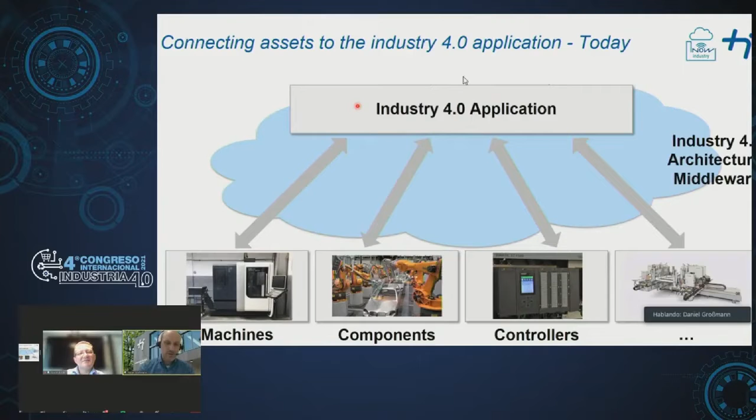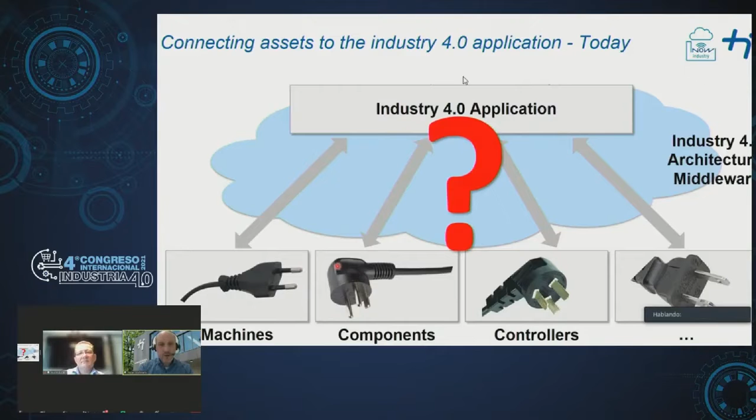So the problem with that is that today, as many of you know for sure, all these vendors have different communication protocols, different data structures. So as shown by these different symbols of plugs here, we cannot just seamlessly connect them into Industry 4.0, but we need to do data engineering. So that means we need to build software to extract, transform, and load the data. And this software sometimes looks a bit shaky.

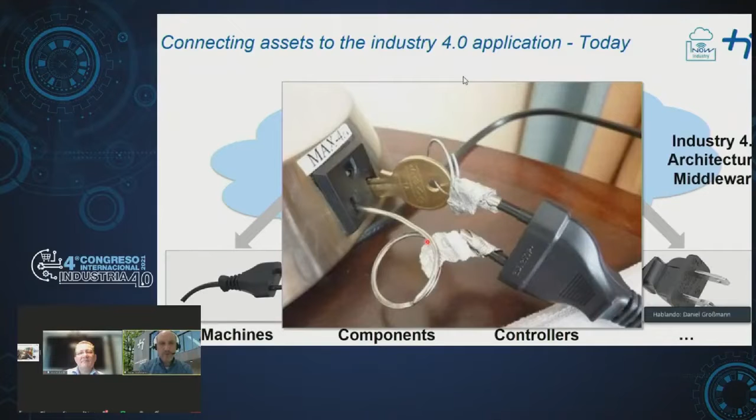So we implement some data adapters, drawing data from devices, transforming them, but quite often it's not very robust software. So I always like to show this picture because this symbolizes the type of data connection that we have between the machines and our Industry 4.0 applications. So well, this can be done and it will work. So we can go ahead and bring the data from the components up into an Industry 4.0 application and then go ahead and process it.

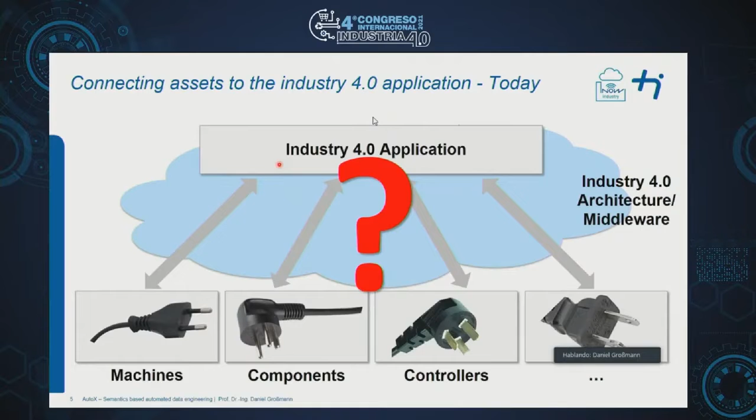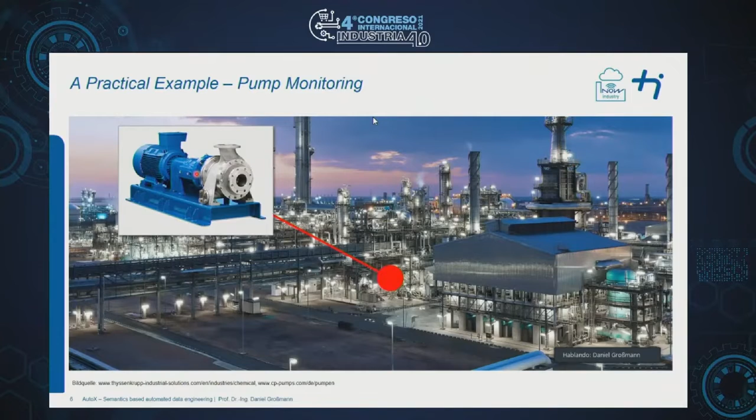So this pump will degrade over time, and the idea is to monitor that pump so that we can see that it's degrading, and we can predict when it will fail and then do some maintenance before it eventually fails. So this is the use case.

It's a very straightforward use case. So if we want to solve that use case, what is the typical approach today?

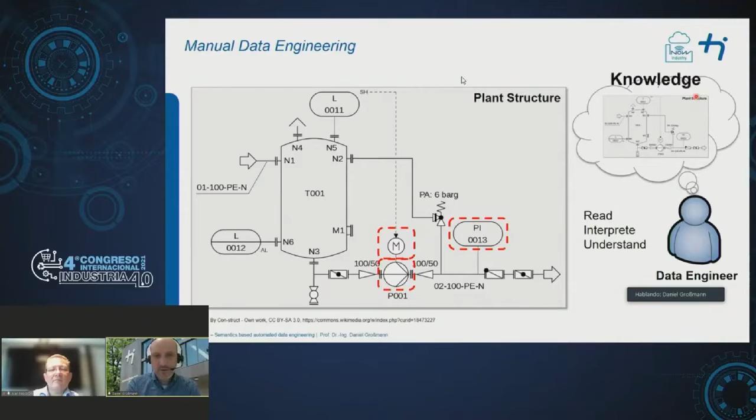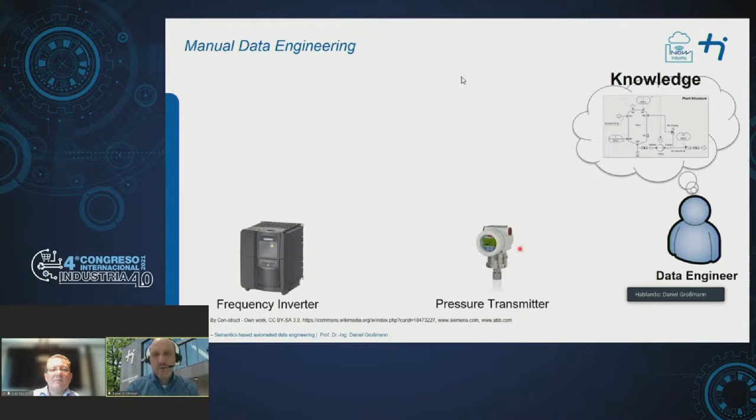So what would he or she do? First of all, you need to find the frequency inverter for the motor and the pressure transmitter in the automation system - you need to find which frequency inverter and which pressure transmitter you need to get the data from. And then you can get the data and bring it into your pump monitoring and optimization application.

Then transforming the data, because they have different data types, the data structures are different, so we need to transform them. And once we have done this, then we can load the data into our probably cloud-based monitoring and optimization application.

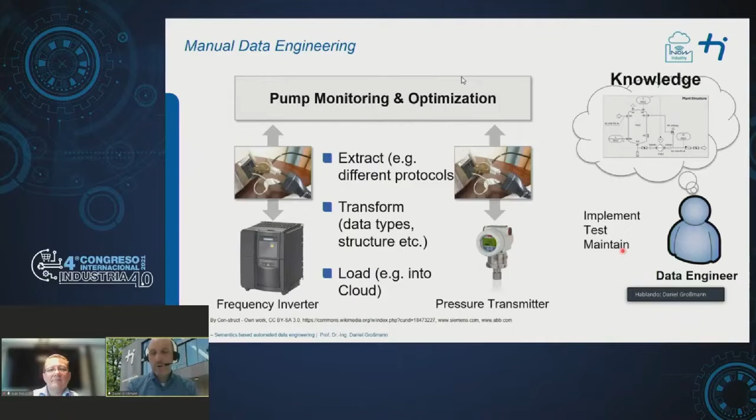So the task of the data engineer is first to get the knowledge how to do this, and then to implement it, to test it, and this may be the biggest pain of all - to maintain it over time. And this can be done, no question. So now we have the pump monitoring up and running for this pump in our chemical plant.

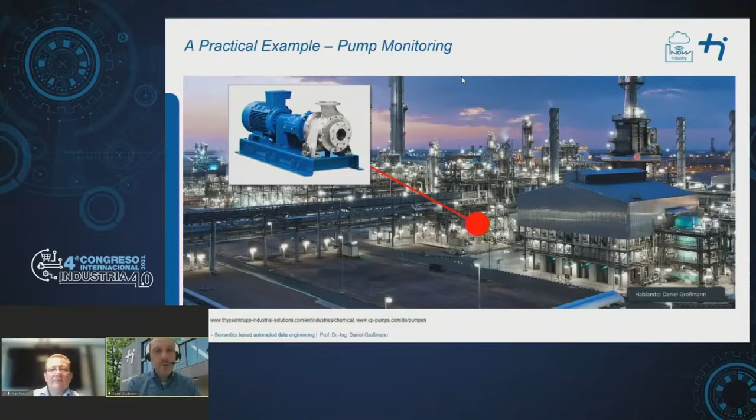But chemical plants tend to be quite big installations. So the problem is there is not this single pump, but there may be hundreds of pumps in this chemical plant. And now the question is whether it's a good and useful way to go ahead, like with this manual data engineering, because what happens is...

Doing all these steps manually is a lot of effort. A lot of effort equals a lot of time, and a lot of time equals a lot of money. So in the end, doing all this manually, it's questionable whether there will ever be a return on invest, and whether monitoring all these pumps really pays off, or whether it would be the better strategy to just let the pumps run until they die, and then get a new pump into the plant.

This is, of course, a question of criticality. For very critical rotating equipment, this makes sense, but for not so critical rotating equipment, it could easily be that implementing and maintaining these data pipelines is more expensive than just not monitoring the asset, not monitoring the pump.

So maybe there is a better way to do this, and this is where I want to emphasize that what we need really is information. Data is fine, but data needs to be extracted, transformed, and so on. What we need is information, because information is knowledge, and I can use that knowledge to plan actions so that I can reach a defined goal.

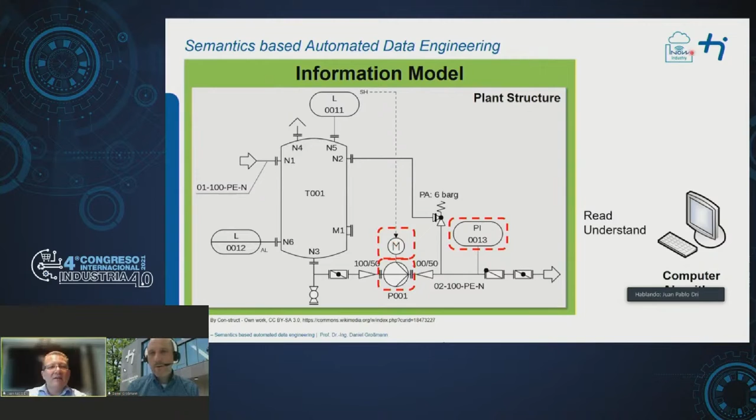We have not a lot of time. Could you please round off the final idea, Daniel? Come again? If you could close the presentation with the more important conclusions. Okay, all right, I will go ahead and try to make up some time.

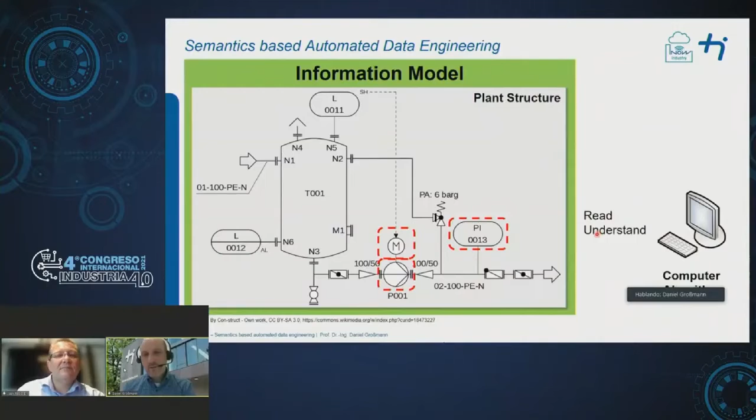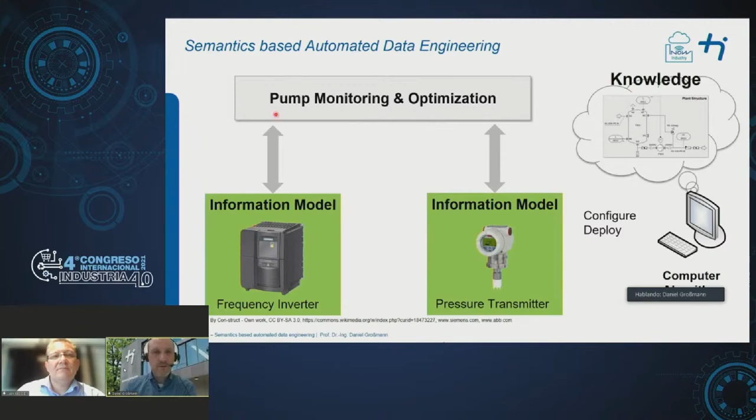So by reading and understanding that, the computer can go ahead and do that trick that was done by the data engineer manually, automatically. And the good thing is that by setting up this pipeline using configuration and deployment in an automated way, that can be done by a computer in a matter of seconds for hundreds of pumps at the same time.

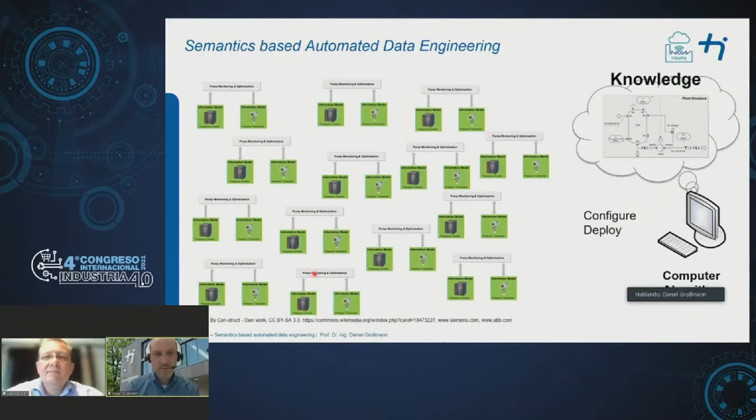So now if we look at the plant with a lot of pumps, all of a sudden effort is no problem, time is no problem, and also therefore not money, because it's all automatic. And now the return on investment is clear because a computer is doing the costly part of the job.

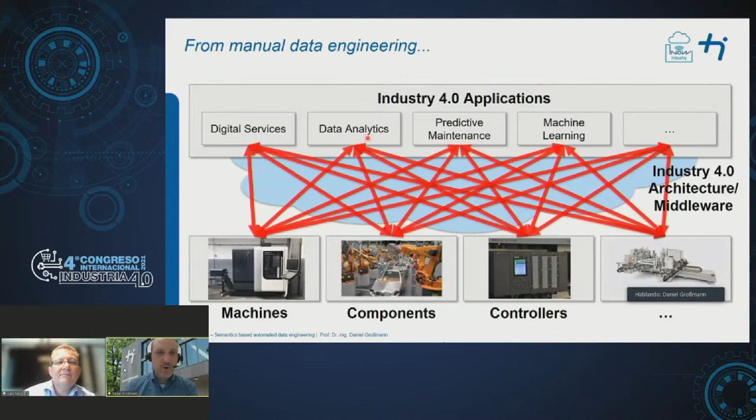So let me just conclude. We need to go from manual data engineering, where we set up these data connections manually, to automated data engineering, where we use standardized information models to connect our production assets to Industry 4.0 applications, because otherwise the manual effort is just way too high and the return on investment is not really available.

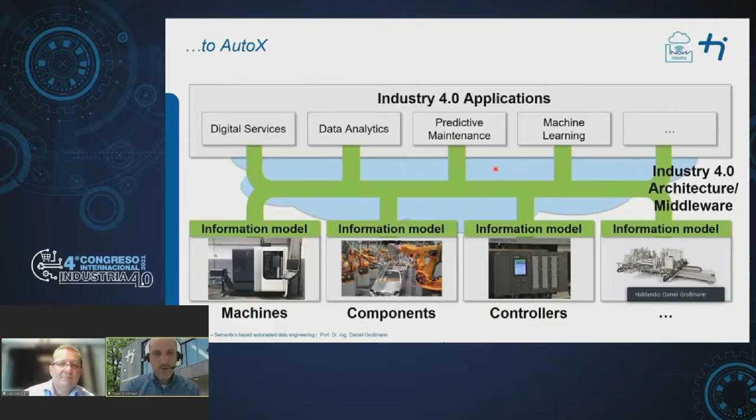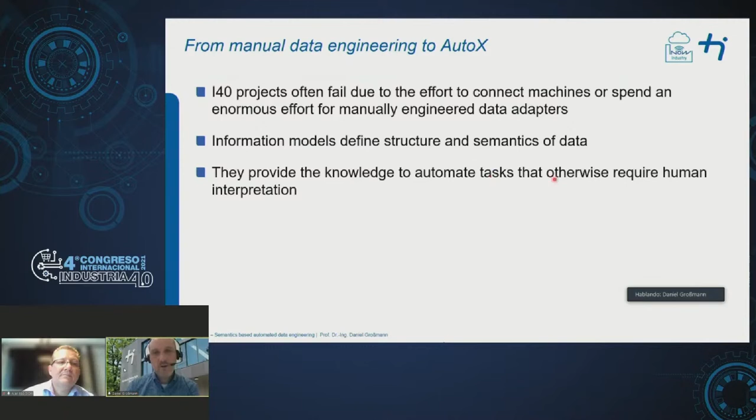Coming to the end, in Industry 4.0 I often see projects that fail because connecting and getting the data from the machines is either a big and enormous effort. Information models reduce that effort. They define the structure and the semantics of the data, and this can be used to automate tasks that otherwise would require human interpretation. With that, information models are essential to Industry 4.0, and information models with the semantics they provide are the basis for future automated data engineering. So they are the basis for AutoX, for Auto anything.